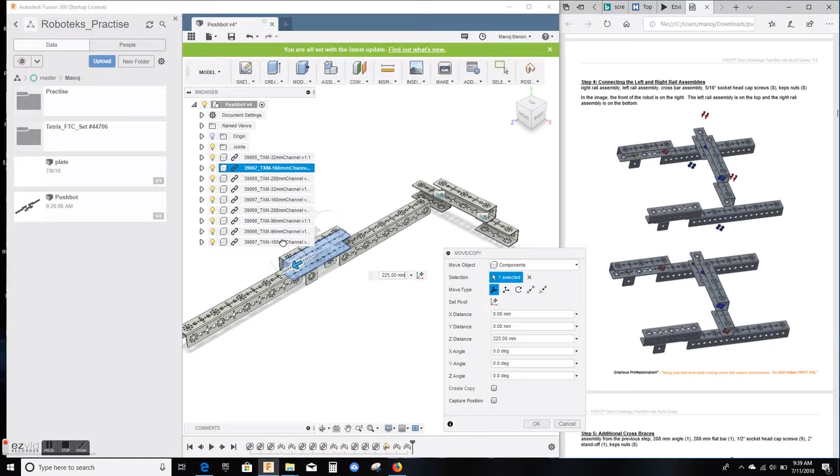Now I would probably leave this channel in this place, just move it a little bit out of the way. So let's find this channel. I'm clicking on it. I see it's highlighted, underlined here. So I highlight it. Again, hit M for move. I will probably move it a little bit like this. Translate it so it's clear of this assembly here. Just leave it there for now. Say OK.

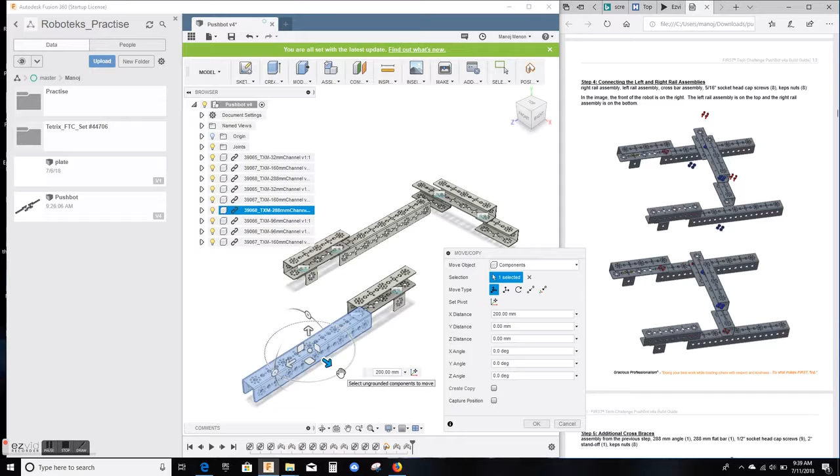Finally, you want to move this assembly here. Again, it underlined it for me, so it's here. I'm going to say M for move. Move it here. You can see it clearly. And basically, I have to position it like this channel over here. So I'm gonna just basically turn it around using this circular handle. I'm just gonna turn it around 180 degrees. Again, look for exactly 180, otherwise it will not be aligned properly. I'm at 185, I need to be 180 exactly. There we go. So now we have 180.

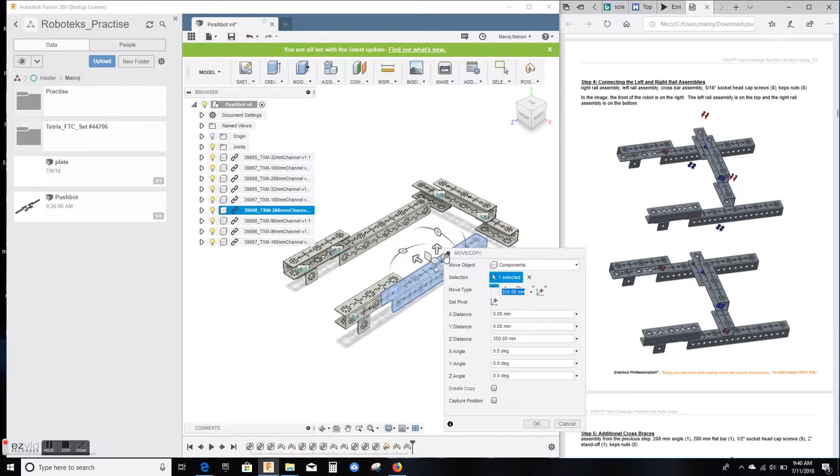I can probably even move it back a little bit using this translation and move it a little bit out of the way or apart like that. There you go. Good enough. Say OK. It looks more or less like how this is lined up here now. And you really don't need to do all these steps, because in the end, if you know how to define a joint, it will come together. But it's easier and less complicated if you position them like that first.

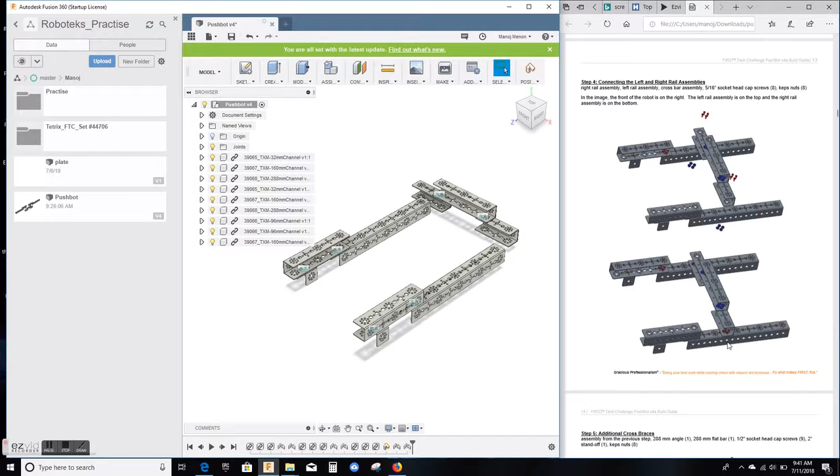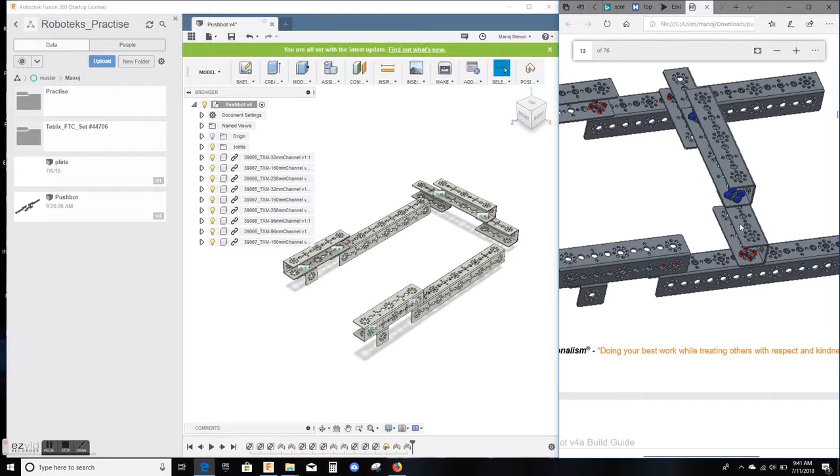Now all you need to do is make these two joints. 4 screws here, 4 screws on the other side. Basically, it's the last set of holes in the crossbar. And if you remember, you had to join it to, let's zoom in here a little so you can see better. It was joined right at this hole. So that was first, second, third, fourth, fifth, sixth, seventh hole. And on the top of the plate, basically the 7th hole position is what you want right here. Similarly on the other side. So let's try to do that.

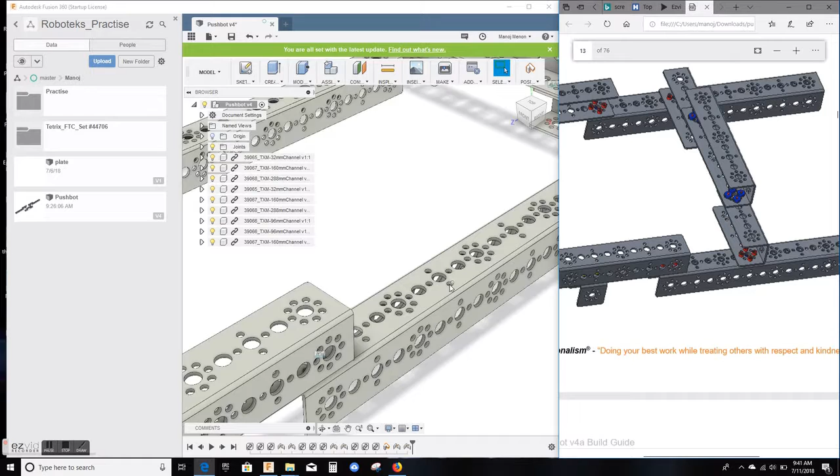I'm gonna find basically the 7th hole, which is 1, 2, 3, 4, 5, 6, 7. So I want to join basically on the top surface here. I'm gonna pick just one hole. We don't need to do all 4, just like before. 1 is enough. So let's just pick this hole. You can actually also pick the center, doesn't matter, but since we are actually using screws, this is what is going to be fixed. So let's do it that way. So I'm gonna pick, this is, remember, the 7th hole. I'm gonna pick this one.

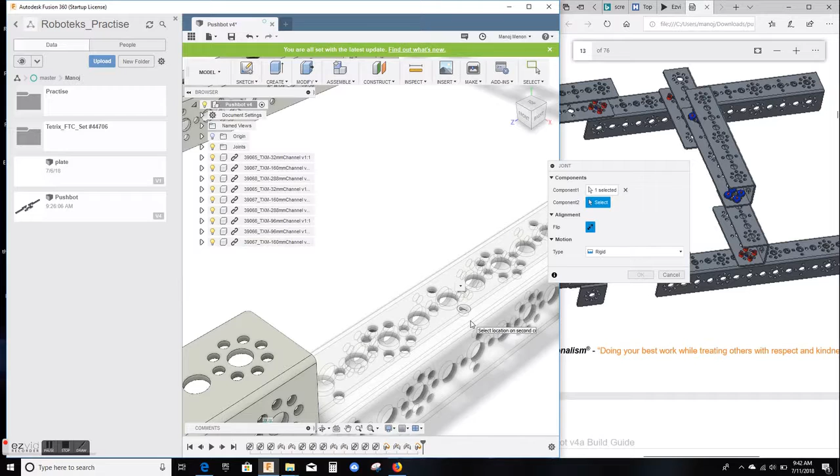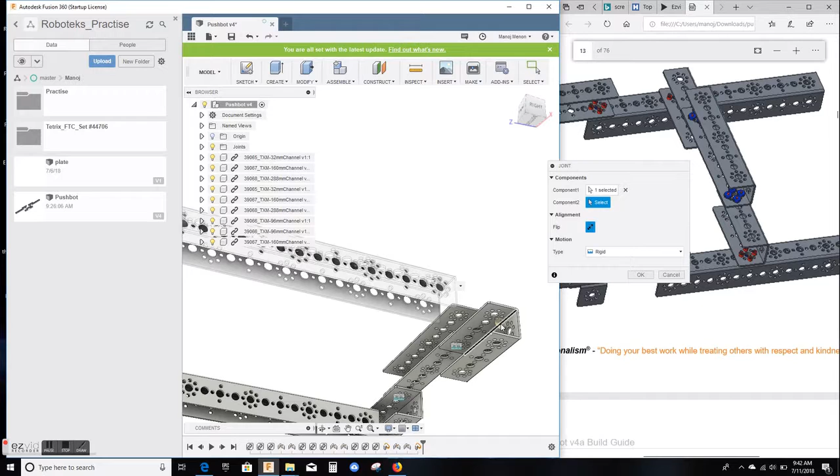Again, use the menu called Assemble, command called Joint, capture the position if it asks you, pick the first one, that is this edge, with the control button pressed down, center. So I got the 7th hole there, and it needs to basically be joined on this channel here to the last position. So I'm gonna scroll. Remember, the top side of this channel will go to the underside of this channel. So I need to just rotate it to find the underside. And it's basically this hole that I need. So again, same procedure, get the center, and you should see everything moved as a rigid joint.

One thing you will notice is what happened. These 2 are left over here, and only this moved. But we had already defined a joint here. Don't worry about it. This is just to show you the animation. You have not yet hit OK. When you hit OK, everything will come in place. So that looks good to me now. That's just the way it is in Fusion. It shows you part of the joint before it moves everything, just so that you have a chance to confirm it. So let's do the same on the other side.

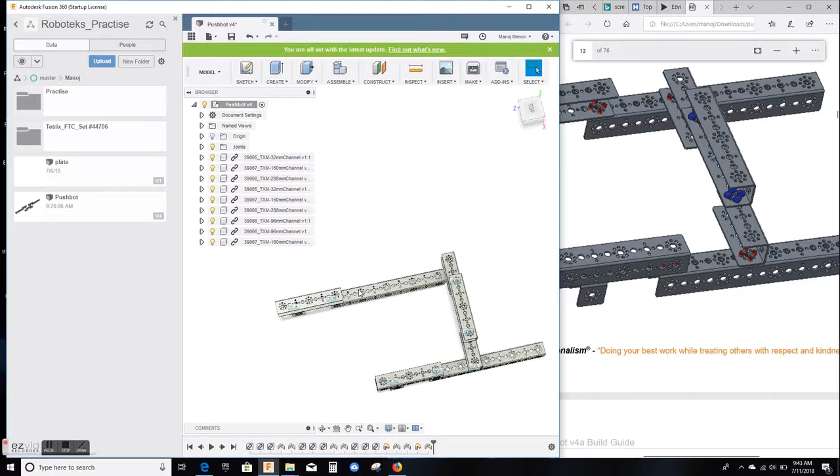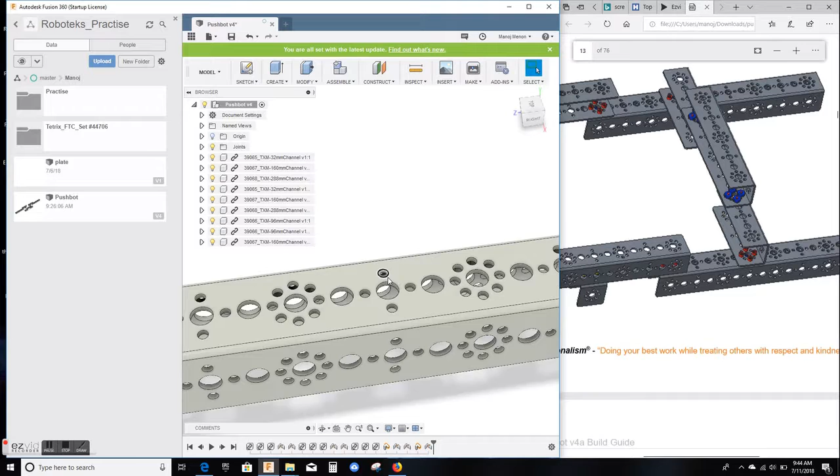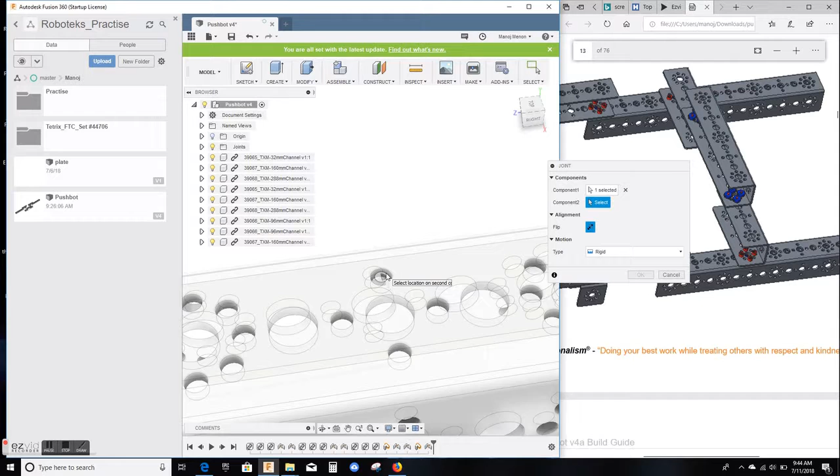I'm gonna find the 7th hole. 1, 2, 3, 4, 5, 6. Actually, this is not really clear to see. Let's do this. 1, 2, 3, 4, 5, 6, 7th one on the top. This time I'm going to go with this hole on the outside here. Let's use the menu Assemble, Joint. I'm going to pick my first joint as this edge. Zoom in as much as you need to be sure you're getting the right edge. Use the control button, click the center. That's my first component. Let's zoom out.

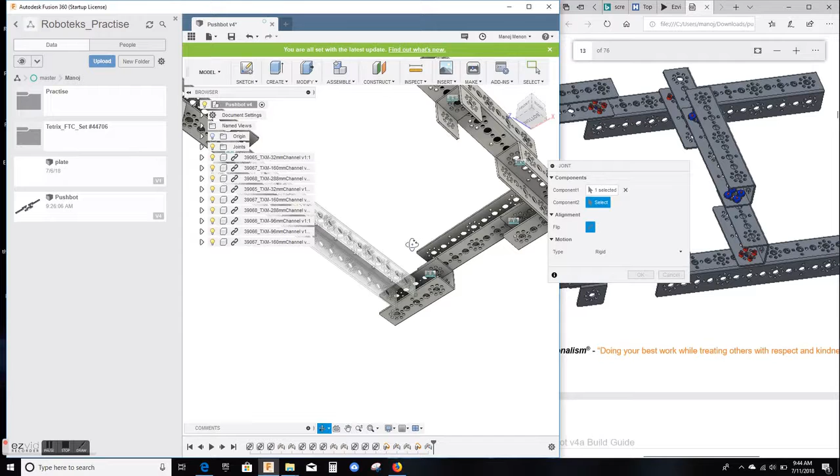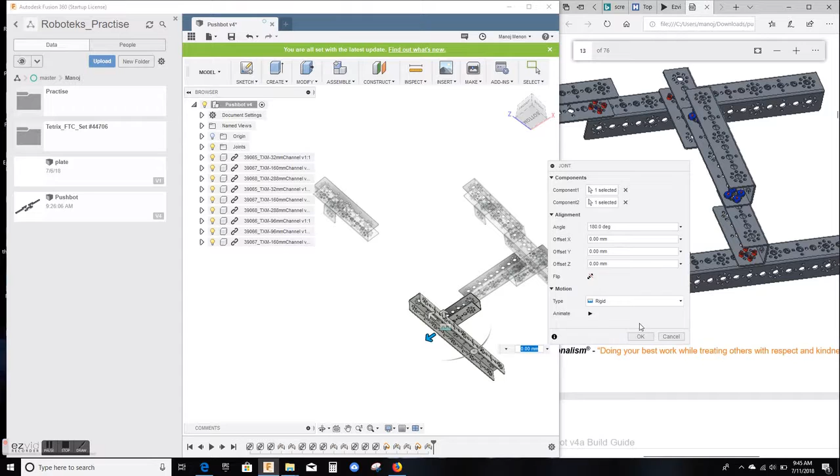The top of this has to go to the underside of this channel. So manipulate it however suits you the best, so you can find the underside of that one. And I picked the outer one on that channel, so I'm gonna pick the outer one here also. And again, this time you'll just see part of your channel has moved. The rest is floating in space over here. Don't worry. Just make sure it's rigid and hit OK. And everything should be in place now.

I'm going to go to the home button here. And as you can see, everything is exactly like it should be. So at this point, I'm going to hit save. User saved is fine. And my Pushbot is now assembled.